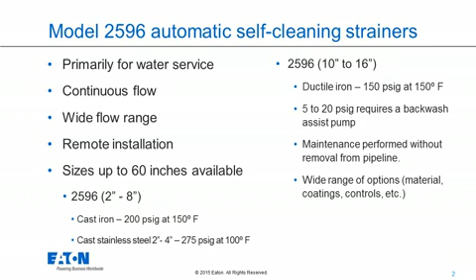A good selling point is that the 2596 strainer is ideal for a remote installation. With a control panel and proper setup, these units will automatically backwash, so they can be left unattended for weeks or months without any intervention from an operator.

Eaton produces the only convoluted element which provides the maximum screen area in the industry. This greater surface area produces better results, which gives Eaton a distinct advantage over the competition.

We offer cast and fabricated materials, including a range of compatible construction materials and alloys to meet the needs of customers with specific requirements for wetted materials in the pipeline.

If the customer has dimensional limitations, we can provide custom strainers. If the vessel must operate under unique design criteria, such as high temperatures, adjustments can be made for the corrosion allowance by thickening the shell of the vessel. If there are seismic requirements, we can design that into our fabricated units.

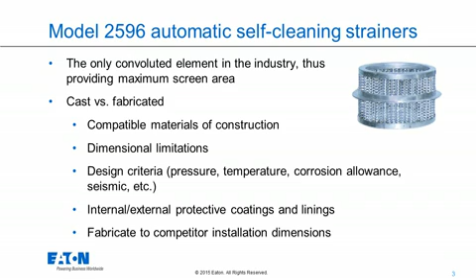We also offer a wide range of internal and external protective coatings and linings. Many are standard, but special coatings can be offered to meet the customer's requirements.

Let's review how the Model 2596 strainer operates. We can see that a small portion of the element is cleaned by a reverse flow of the strained fluids. The majority of the process water continues through the strainer, and only a very small portion of that inlet flow is used to backwash the strainer. The remaining screen continues to strain, providing uninterrupted flow to the process.

For example, if we have a 10-inch 2596 self-cleaning strainer, the backwash line would be 2 inches, and that backwash water would carry the debris away from the strainer to be disposed.

The backwash time would be dependent on the amount of debris that is contained in the process water. Sometimes process water is very clean, and a backwash might only be required once every day. Sometimes the water is very dirty, and every 5 or 10 minutes a backwash cycle will be required.

Our strainer controls include an adjustable cycle timer from 6 seconds to as long as the user needs. The 6-second timer is really too short to be usable; those ranges are only for testing purposes. The end user could customize the program to whatever time cycle they require for the application, for example, a 2-minute backwash cycle every 2 hours or a 4-minute backwash cycle every 6 hours.

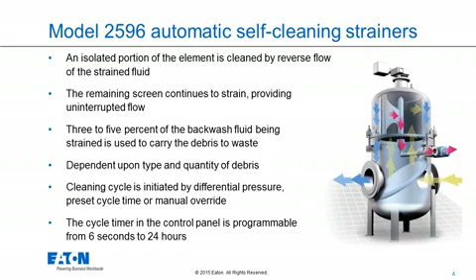Here are some of the applications that use the 2596 strainer. The first application is seawater. We have strainers installed on platforms, including oil rigs, which would use seawater for cooling purposes. Facilities that use raw water from lakes as service fluid may also require a 2596.

In spray nozzle applications, the 2596 is used to strain water so that debris won't clog the nozzles used for cooling purposes. Other applications are well water, irrigation, and membrane protection in drinking water applications where well and river water are used. The strainer would come before the membrane system in order to remove coarse solids such as sand and silt so that the membrane wouldn't be overloaded with large amounts of debris.

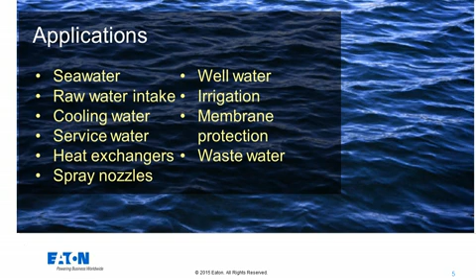The 2596 is extensively used in wastewater, not primary wastewater, which is also referred to as sludge. Instead, we would want to use the 2596 in the secondary effluent stage to remove any debris that might fall into the process water.

Now we'll review the application sheet. It includes what you need to know as a technical sales or service rep to accurately quote the correct strainer. Please refer to the latest application data sheet.

Confirm that the fluid being strained is water and not crude oil or liquid chemical, because the strainer is not designed for those fluids. We have other Eaton products designed specifically for those processes.

You must also confirm the flow rate to make sure that the 2596 is installed and sized correctly, so it yields a line velocity flow of 6 to 10 feet per second. Once you've determined the flow rate, size the strainer accordingly to make sure it's not starved for flow or overburdened with excess flow and debris.

For solids loading, the standard recommendation is 200 parts per million max. Consider the flow in gallons per minute. For example, if you had 1,000 gallons per minute of flow, that would amount to 2 pounds of dry solid waste on average. Be sure the applications you're quoting have 200 parts per million or less of debris.

If the amount exceeds 200 parts per million, you should consult with the engineers in the U.S. to ensure that the application is compatible and an accurate quote can be developed.

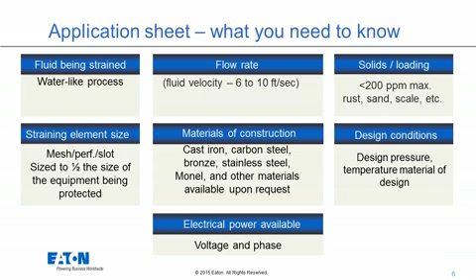It is important to identify what power supply the customer has, and then we can design the control systems to match their needs. We have input starting at 115 single volt phase going up to 230, 460, and 575 volts. We also have international voltages ranging from 380, 400, and 415 volts with 50 and 60 hertz. This information can be located on the application datasheet.

Let's consider sizing. We need to discuss this with the customer to give them an idea of what to do with the backwash flow. Our strainers have an average backwash flow, regardless of size, of about 3 to 5% of the inlet flow. We need to help the customer plan ahead as to where the backwash flow will go.

There must be a dedicated line for the backwash. It cannot be run into a floor grate or floor drain due to the risk of flooding. This dedicated line is especially important for larger units because there's a significant amount of backwash flow, sometimes hundreds of gallons per minute. Ideally, we would want the strainer or backwash line to come out of the side or the bottom and go straight down to the plant's backwash pipe, so there's no back pressure on that line.

In most cases, that's not feasible, and the backwash line may be 20 to 30 feet away. Find out how long the backwash line is going to be, if there are any elbows, or if there's any elevation. Any back pressure or friction losses incurred by that backwash line are going to reduce the efficiency of the strainer operation. We can compensate for all of that, but obviously we need the information first in order to develop an appropriate design.

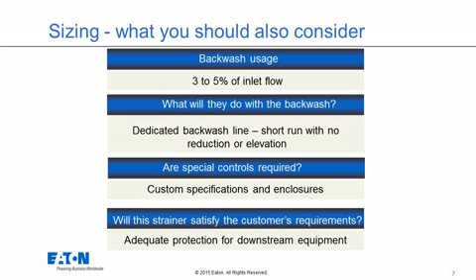Will the strainer satisfy the customer's needs? We want to ensure that it provides adequate protection for the downstream equipment.

Let's review sizing. First, provide the application worksheet, which can be found on the website, and help the customer complete it, including any additional specifications, such as mechanical or electrical. A large project may have dozens of specifications that you will need to obtain from the customer. Be sure to ask for all the documentation.

Are there any criteria that have to be met, such as corrosion allowances? Does the strainer need a non-standard design pressure rating instead of 150 psi? Find out if any non-destructive examination is required, such as radiography. We also need to know how much radiography. Is it 5 or 10% spot weld? Is it 100%? That information is necessary because it impacts the price of the strainer.

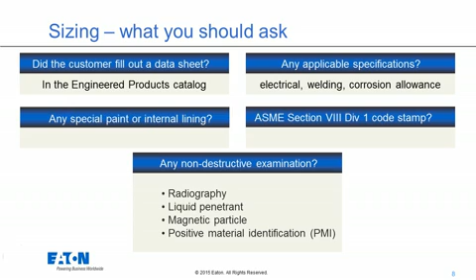We also offer liquid penetrant tests, magnetic particle tests, positive material identification, or can run tests for any special certifications needed.

Now, let's review our straining elements. First, we'll go over the convoluted element mentioned earlier in this presentation. Typically, the largest size is about 1/4 inch. The smallest size possible for a convoluted element is 1/32 inch, or 1 millimeter.

If the customer needs a finer strainer to capture fine sand or silt, then a convoluted sinter bonded mesh should be used. Our sinter bond element is made up of 3 layers: a perforated layer for strength, a coarse mesh spacer that provides a gap between the rated mesh and the perforated backing, and finally the rated mesh in the back. This manner of bonding is called a sinter bond effect. We use pressure, then heat those 3 layers together to make one sheet for a very strong bond.

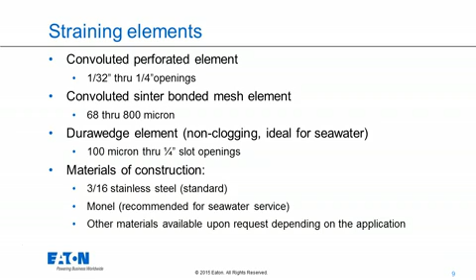We typically provide that in 316L or 316 stainless steel. Next, we have the Dura Wedge or wedge wire element, and it's available in 100 micron through 1/4 inch slot openings. It is available in 316 stainless steel, which is standard, but we also can provide special materials including Monel 400 and 2205 stainless steel.

A common problem in many automatic self-cleaning strainers is inefficient backwashing due to debris lodged in the strainer element. The Model 2596 2 through 8 inch strainer features a unique vane plate positioned at the inlet of the strainer element, where it contacts the process media before it enters the element. The vane causes the incoming liquid to move in a circular motion, forcing the debris to lay up against the surface of the strainer element rather than lodging in the element's openings.

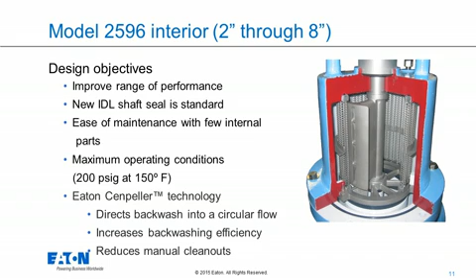Lodged debris can negatively impact the differential pressure across the strainer, resulting in a shutdown of the strainer and manual cleaning of the element. Cenpeller technology helps prevent this situation and delivers easier and more efficient backwashing.

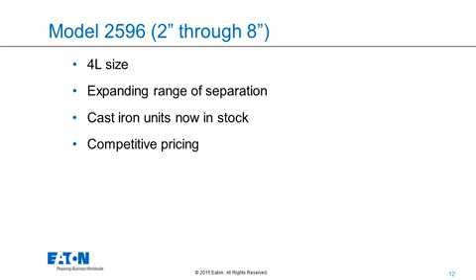Something that we commonly see is an application with a flow rate of 500 gallons per minute, and we have 3 strainers that are appropriate for this flow range. Sometimes the 4-inch strainer might be a little too small, but the 6-inch might be a little too big, so the 4L strainer was developed. The 4L strainer is a combination of the two and features the 4-inch nozzles and flanges, but the body size of the 6-inch, so more flow can be accommodated.

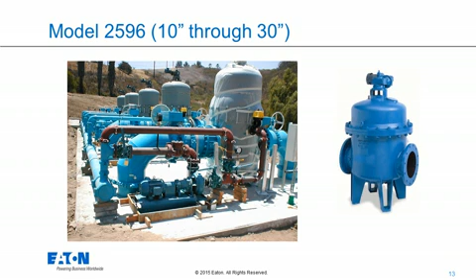Pictured on the right side of the slide is a 10-inch 2596 strainer. On the left is an application located in the western United States that includes 5 30-inch strainers.

What are the advantages of the 10 through 30-inch strainer? They include higher flow rates and a wide range of materials. An expanded range of design criteria means we have no dimensional limitations, and internal linings and coatings are available. One example is an application requiring a neoprene rubber internal lining, which would be excellent for seawater applications.

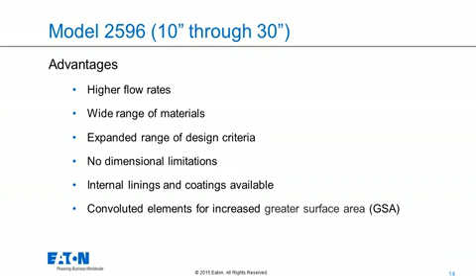As you can see from the slide, Eaton has many options to meet customers' unique requirements.

Eaton automatic control systems are designed to monitor and operate backwash cleaning systems. The design allows field adjustments to suit the demands of the service conditions, ensuring effective cleaning with a minimum use of backwash fluid. The ACS-1 features a NEMA 4-rated panel box with an adjustable timer, differential pressure override, and 10-amp

control relay for backwash valve activation. The ACS-2 has all the features of the ACS-1 plus a motor starter. The ACS-3 has all the features of the ACS-2 system and includes a 460-volt, 120-volt step-down transformer.

ACS-4s are meant for international applications. We can put in a specific transformer to step down the input voltage as required. Therefore, we can provide controls for any country in the world, optional designs to meet specific requirements with special wiring arrangements, and panel boxes can be furnished.

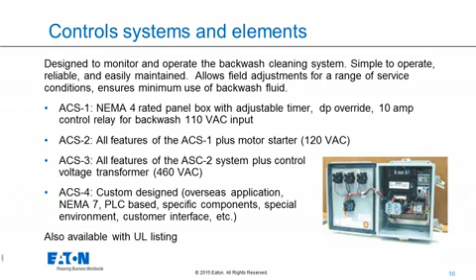Moving on to control accessories. Our standard control includes a fabricated control panel and a motor-operated automatic backwash valve. The motor-operated control panel would provide power to the valve actuator.

Eaton also provides a differential pressure switch with a preset setting which can be installed across the inlet and outlet nozzles of the strainer. The DP switch operates by sensing high differential pressure across the element due to debris as the element becomes clogged. So, for example, if the DP switch were set to 3 psi, it would activate the backwash cycle when the differential pressure is reached.

This is in lieu of a timer. An upset condition might occur between the scheduled backwash times, and this is where the differential pressure switch protects the strainer from high solid loads. We can provide flow and differential pressure monitors for both the line pressure and the differential pressure.

There are many options we can offer customers when providing custom control panels. Perhaps a customer wants to know if there's a problem with the strainer motor, such as motor overload, and the strainer shuts off. Eaton can supply output that alerts the status of the strainer, or if the strainer shuts off.

Another option, Eaton can provide one control panel for many different strainers. For example, you can have up to 10 strainers per application with a single control panel that will integrate those units and provide interlocking to backwash one strainer at a time, sequentially, from strainer 1 through 10.

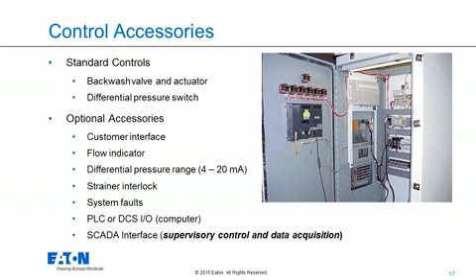The 2596 strainers are typically installed in pipelines with a minimum pressure of 20 psi, but there are many instances when the strainer is installed in pipelines that have less than 20 psi. For example, on the suction side of a pump or the gravity-fed intake line of a plant with only 5 to 10 psi. A 2596 strainer can still be used as long as proper modifications are in place.

When a backwash occurs, the backwash valve opens. When the backwash valve reaches its full open limit, it energizes the backwash assist pump and creates a suction or a pull on the backwash line to aid in pulling out debris from the strainer.

The backwash assist pump works well because the backwash water can be pumped away. Not only does it aid in cases of low system pressure, but also when a customer has a long backwash pipeline or elevation on another floor or level of a plant.

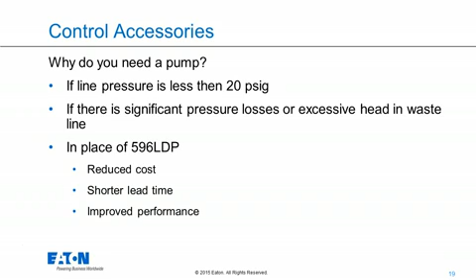So why do you need a pump? If a line pressure is less than 20 psi, or if there is a significant pressure loss or excessive head in the waste line or backwash line, a pump will prevent loss of efficiency in the strainer.

Eaton's main competitors in automatic strainers depend on what part of the world you're selling. Here in the Americas, we see a lot of competition from Fluid Engineering, SP Kinney, and RP Adams. Outside the U.S., we might see more competition from Hydac or Orival. We must know who the competition is and how to adjust our pricing appropriately so that we can provide the customer with a superior product at a competitive price.

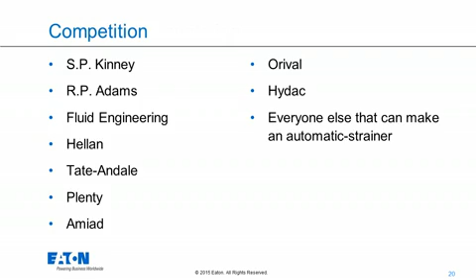Here's some information you'll want to review with your customers during the quotation process.